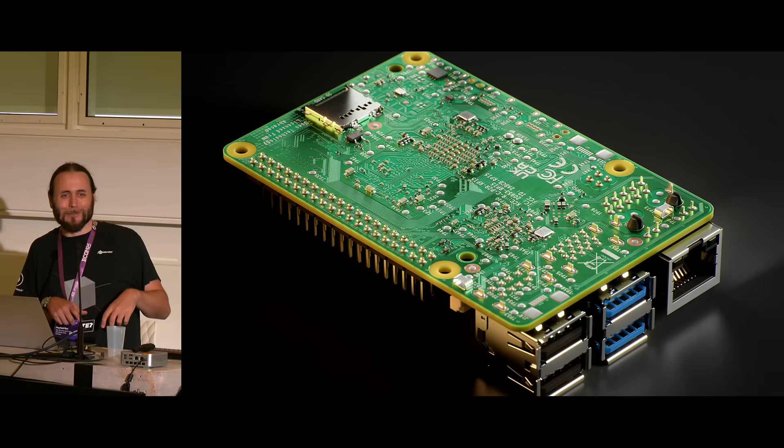So I talked about PCBs. So what is this all about? So basically, I opted for recreating a Raspberry Pi for no other reason than to just do it. And it was a pain, but I think the way an artist has to live is through a little bit of pain. So I retraced all the traces of the PCB. So that's not a photograph. So I spent 2 days in Illustrator doing all the traces.

Right, so where does Blender and Cycles come in? Because all of this was Cinema 4D and Octane. So 2 years ago, I sat down and wanted to try Blender. So I thought it would be a good idea to do a whole project with it, like from start to finish. So what I did was a small animation project where I basically celebrated the 15K subscribers on my YouTube channel.

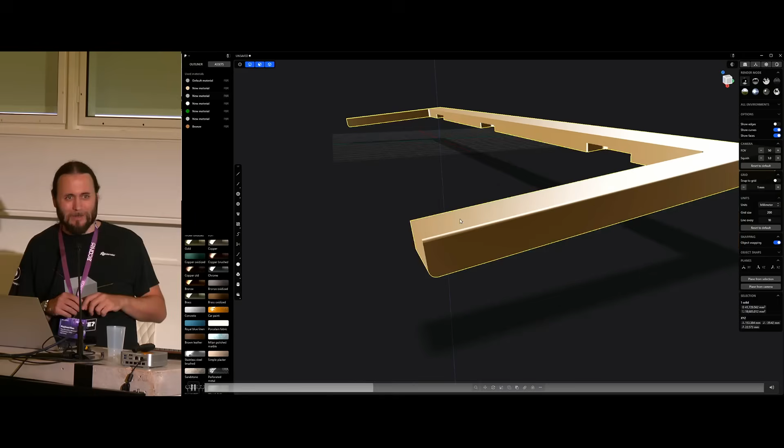Who of you knows what Plasticity is? Not too many, okay. I thought everyone would know, but it's a CAD program. You load in CAD data, so construction data for product visualization, or for actually making the product.

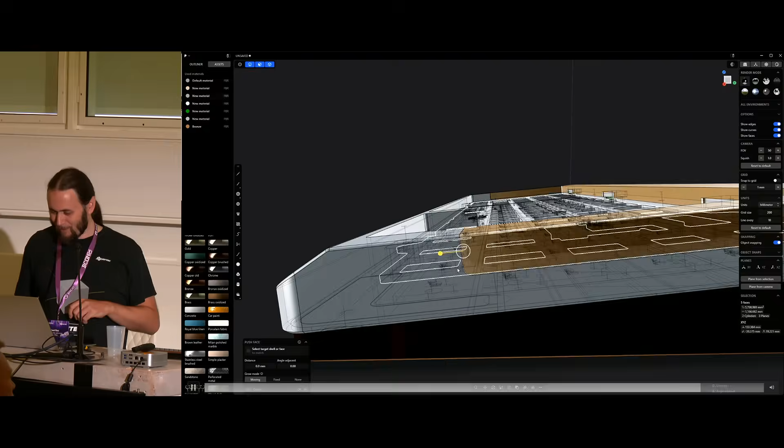So what I do here is, usually when you have construction data, those boundaries are overlapping. So whenever you have transparent parts, you want to make sure there's a gap in between. Otherwise, you end up with z-fighting. At least I think that's what it's called.

Has nothing to do with Russia, but

Right. So you basically add a transparent material, and then you get artifacts. So let me just get the roughness down and move closer, and then you have something like that you probably don't want in your renders. Right.

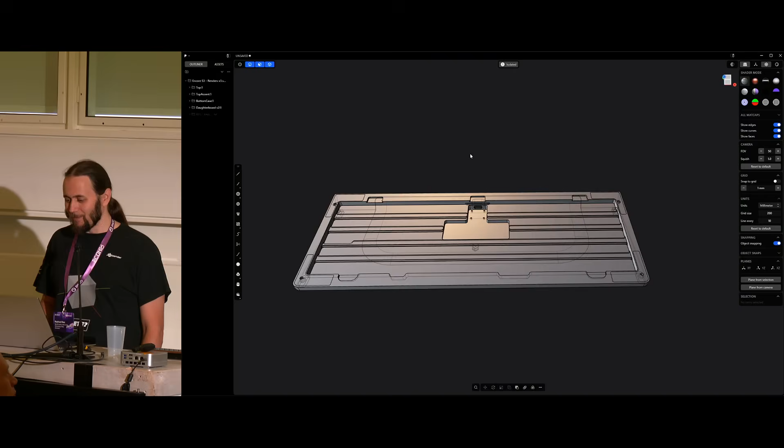And then the other thing I do with the CAD modeler is to bevel those edges, or fillet, as it's called in CAD speak. That sounds wrong, but yeah. You can use a bevel node, but it's always better to have it in geometry. Even if it's very small, it catches light and makes the thing very realistic.

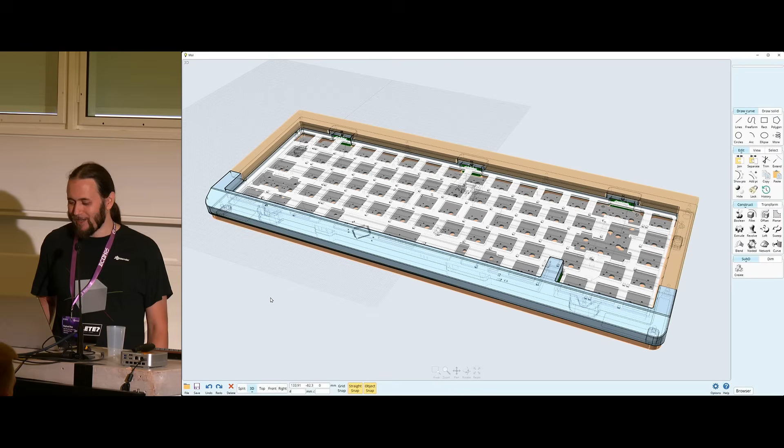All right, so that's the CAD part, computer-aided design, not the animal, although it's very popular right now. So I go through another software called MOI, Moment of Inspiration, for creating polygons from the construction data. There's a bridge for Plasticity to Blender, but I found the way MOI is doing it a little bit more intuitive. It's giving you n-gons, but as long as you don't deform the keyboard, it is fine.

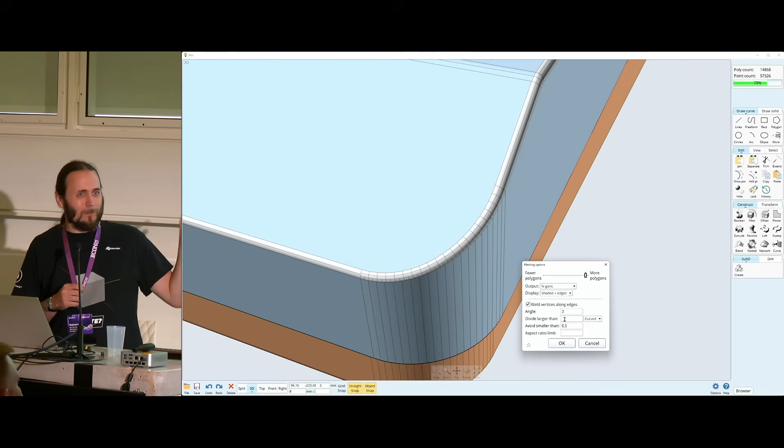Even if you would deform the keyboard, you could subdivide it in the settings somewhere. But dependent on what shots you have in mind, you subdivide it dense enough so it doesn't have any edges, and then you basically create an OBJ or an FBX from it. And then finally, first shot of Blender here.

We are at Blender. So for some reason, I needed to import that with a very low scale, 0.001, so that it would match my scale, because I always work to scale in all of my 3D software projects, because when I build up a library, I can just move them back and forth between projects and don't care about the scale. So I have to apply the scale, obviously, because otherwise, if I shade it later on, the shaders don't match that nicely.

All right, so where are we? In the beginning I thought, hey, maybe let's record everything and then do a time lapse over it. But when I was going away for a coffee, I had to remember to pause the recording and stuff like that. So it added up, and as the deadline shrunk and shrunk, I thought, no, that's not the way. So enjoy the couple of videos I actually recorded.